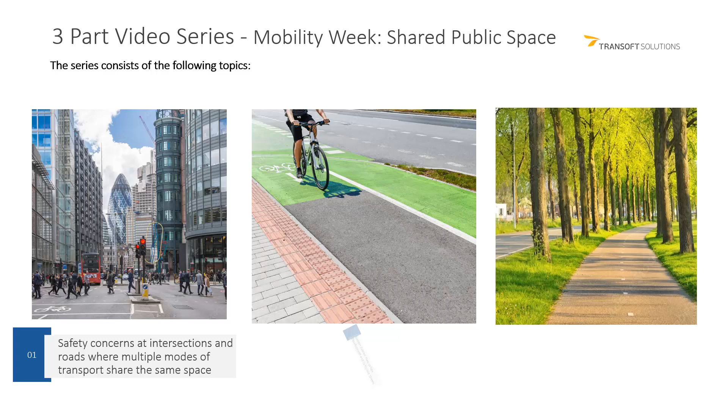The 3-part video series for Mobility Week started with safety concerns at intersections and roads where multiple modes of transport share the same space. The one for today is about success stories, new urban development, and complete streets. And the last one will be future cities and how they could look in future with less modal conflicts and a safer shared space for micromobility and walking.

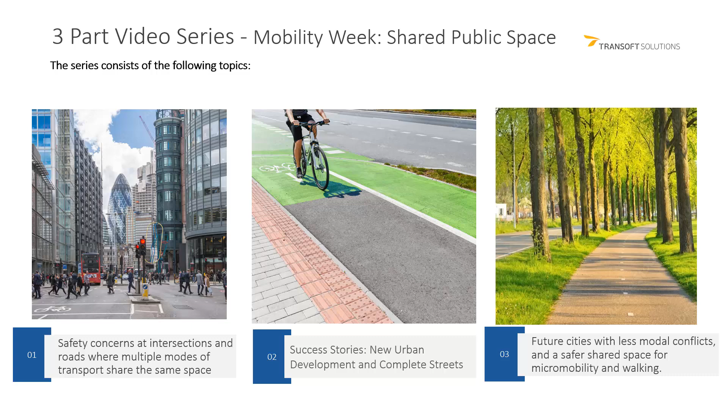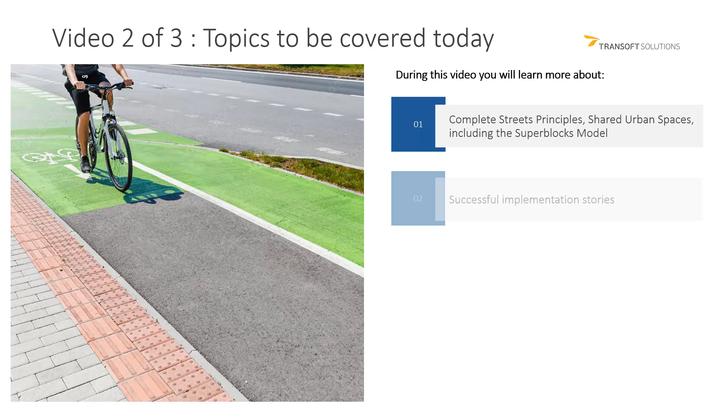Topics covered today are complete streets principles, shared urban spaces, including the superblocks model, success stories, and then advanced swept path analysis of these improvements as analyzed in AutoTurn, and then a quick introduction to our next video.

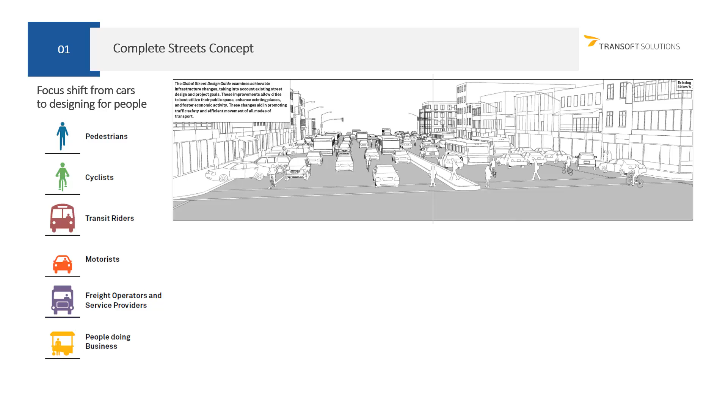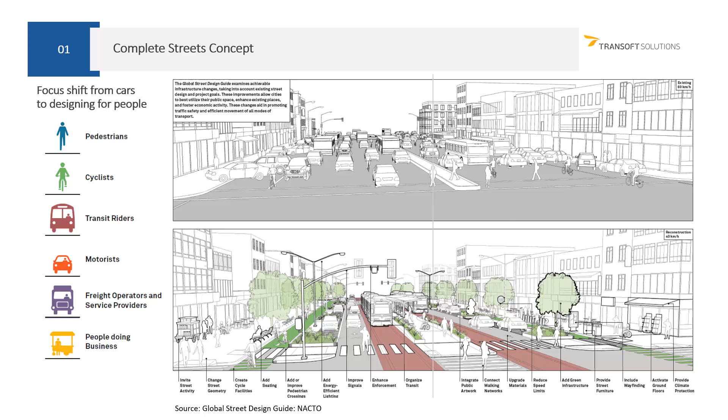The complete streets concept takes what you see here and changes the focus to pedestrians, cyclists, and transit riders, and less on cars. The street space is then totally transformed into dedicated cycle lanes, lanes for cars and lanes for transit, and safe walking areas. The next concept is shared urban spaces.

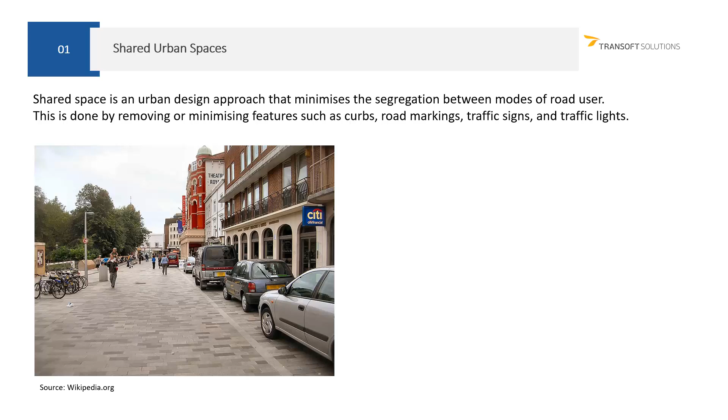A shared urban space is an urban design approach that minimizes the segregation between modes and road users. So it's all more mixed. This is done by removing or minimizing features like curbs, road markings, traffic signs, and traffic lights. Shared spaces can take on many different forms, and there is no single way to design them.

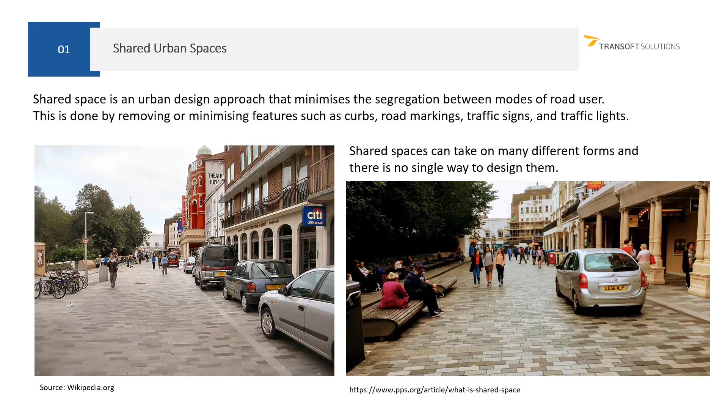Some features of shared spaces can include the following. The center of the street is a shared area and is used by all types of users. There are no curbs, which makes for a seamless experience throughout the space. Limiting level separation between modes makes it easier for vulnerable users like people with limited mobility, wheelchairs, and strollers to move around in the space.

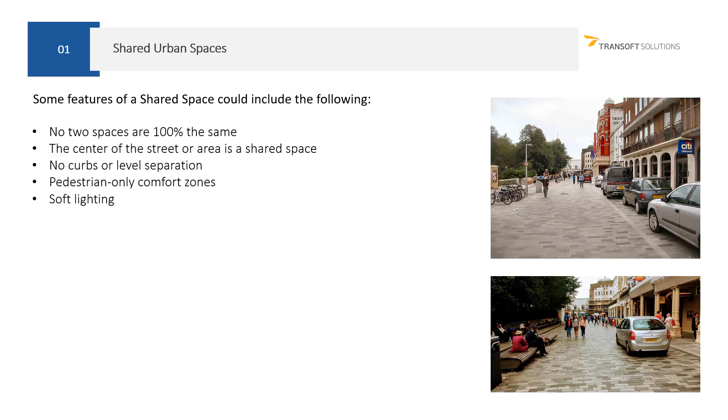There are pedestrian comfort zones, and they consist of obstacle-free pedestrian routes where pedestrians can move around more safely without the risk of conflict with other users. Where possible, these zones are aligned to the proximity of the building faces, and they are normally wider than standard walkways. Soft lighting creates an atmosphere that makes all the users clearly visible. There is well-designed drainage that blends into the environment.

There are furniture zones with shaded trees, seating, trash and recycling bins, bicycle parking, and other comfort items aligned with light poles where possible. There are places for people to gather and rest and mix throughout the space. Raised pedestrian crossings and raised intersections reduce traffic speed.

There are tactile warning strips, used at entrances to the shared space and throughout intersections to indicate a change in the environment, which is necessary for people with limited vision. Then there are sound beacons and audio signals. These are used also to inform blind or visually impaired pedestrians that they are in a shared street, and provide information on its operation and the presence of detectable surfaces, like the tactiles.

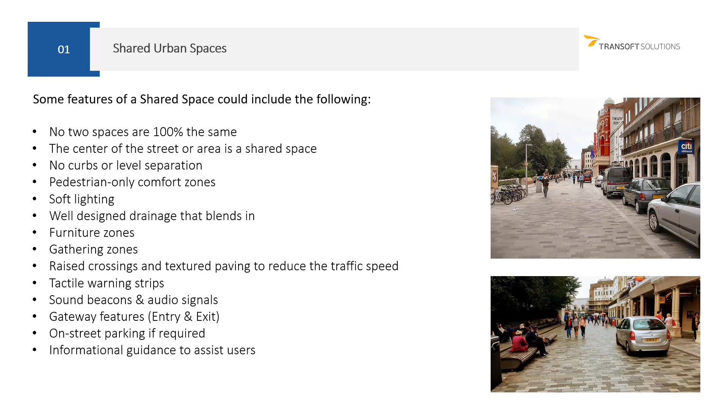In a similar way, at gateways, which are the entrance and the exit to this area, there must be information to notify people that they are entering and leaving a shared space. On-street parking can be accommodated if required, and information guidance is required to help people use the space. This could include signs, kiosks, auditory cues, as well as information provided to apps on your cell phone.

This is an example of a shared space. It's Exhibition Road in London, UK. This is the aerial view just before it was completed. It's 800 meters long and in some places 25 meters wide. It was originally a two-lane car traffic road with narrow footpaths and 3 rows of parking, one on either side of the road and one in the middle. It was remodeled and completed in 2012.

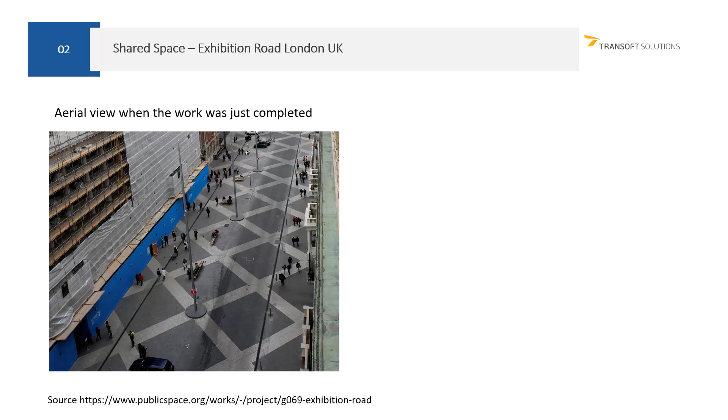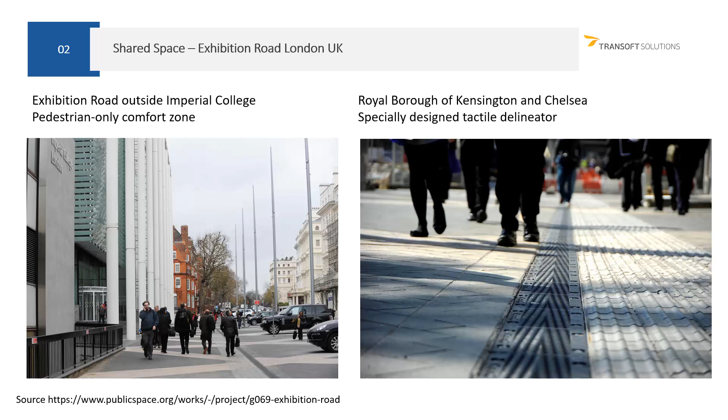This is Exhibition Road again outside Imperial College. This is the pedestrian comfort zone. You can see that there are specifically designed tactiles to inform visually impaired pedestrians to safely navigate through this shared space.

The superblocks model, I want to explain that. It is a model based on taking 9 blocks on a 3x3 grid, like you can see here. Then the principle is to close off the inner streets to cars. The traffic is diverted to the outer streets, and this is then the superblock.

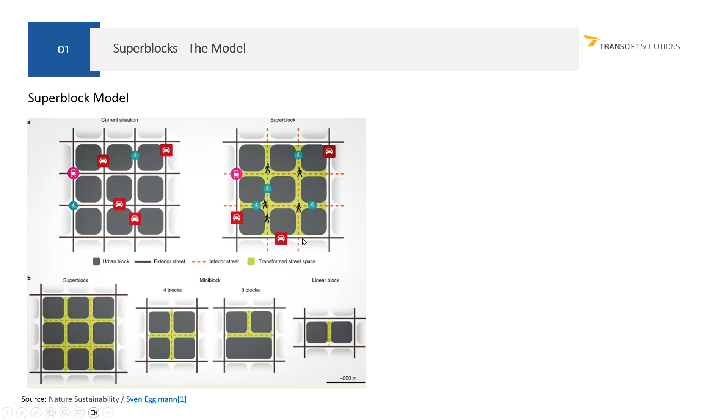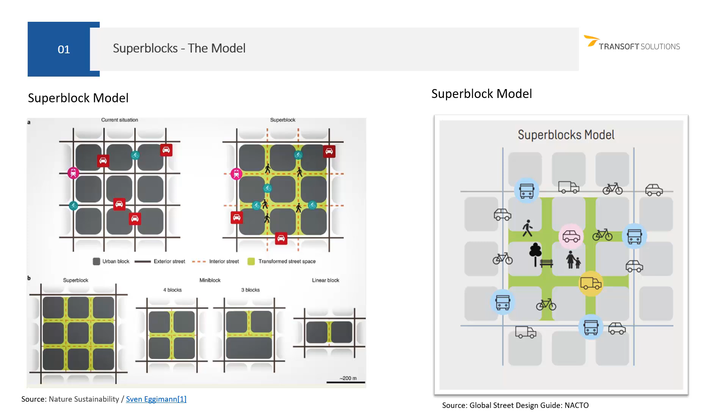The next diagram shows that limited vehicle traffic is allowed inside the block. There will be streets that are earmarked for buses and last mile deliveries, and shared with bicycles and pedestrians. Traffic inside the block is calmed, space is greened and remodeled, and there are more living activities happening inside these superblocks.

In Barcelona, superblocks were implemented. In Barcelona, 60% of the public space is designed for cars, and only 20% of the movement in the city is actually by car. So there's a great opportunity for improvement, and this is why the Superblocks program aims to reduce car traffic. It reclaims the public space for pedestrians, bicycles, and public transport.

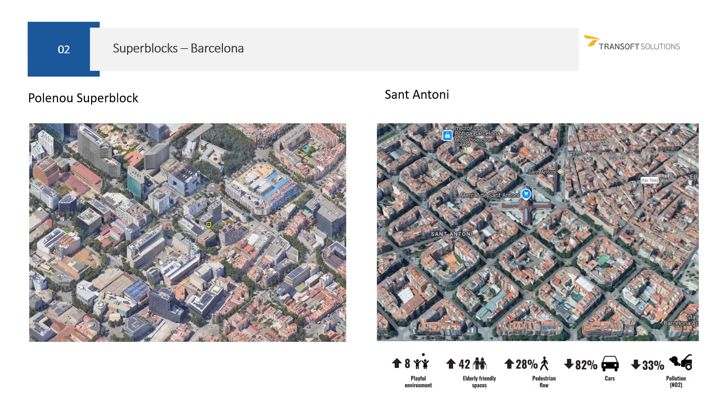In this example of Sant Antoni, you can see it's a more playful environment. More elderly friendly spaces were created, pedestrian flow increased, cars decreased, and pollution was reduced as well. This example shows a before picture of the street where each mode was clearly separated, and the change now is a more livable area for pedestrians and people.

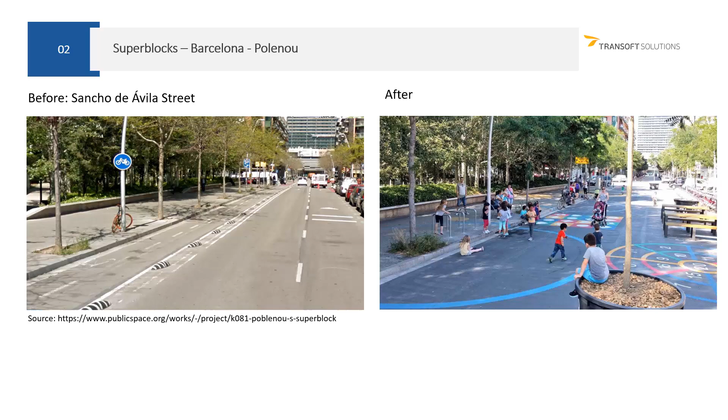Again, here is a road that allows for multimodal traffic, which includes bikes, and it will include cars and delivery vans in this space.

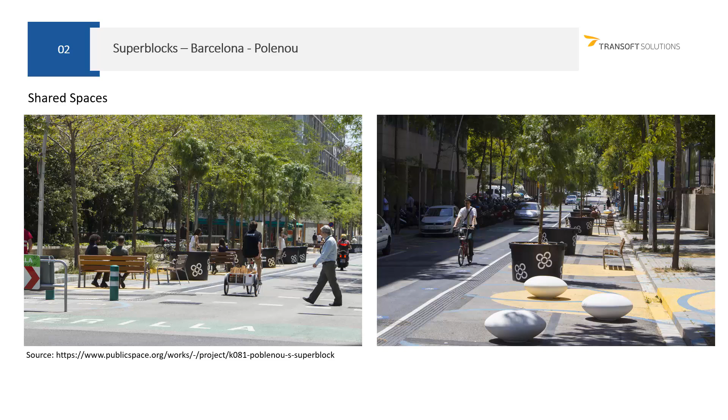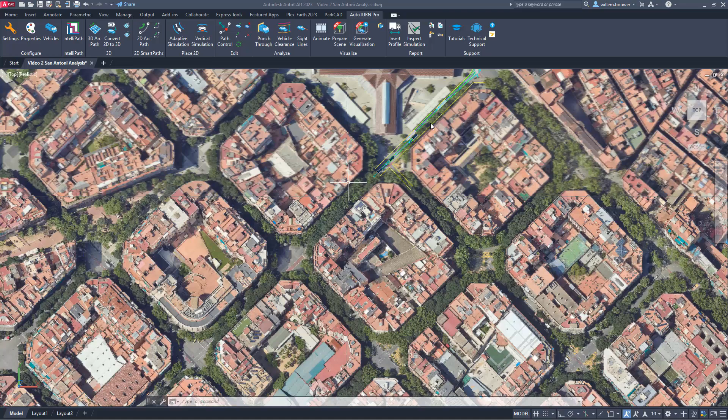In this example, I'm going to show you vehicle sweep path analysis that was done in AutoTurn. And this specific area is the Sant Antoni area in Barcelona, Spain. And you can see that I've traced some of the space already in yellow. I'm just going to zoom in a little bit more. And you can see I've traced it in yellow. And then I've done a sweep path analysis already with a bus.

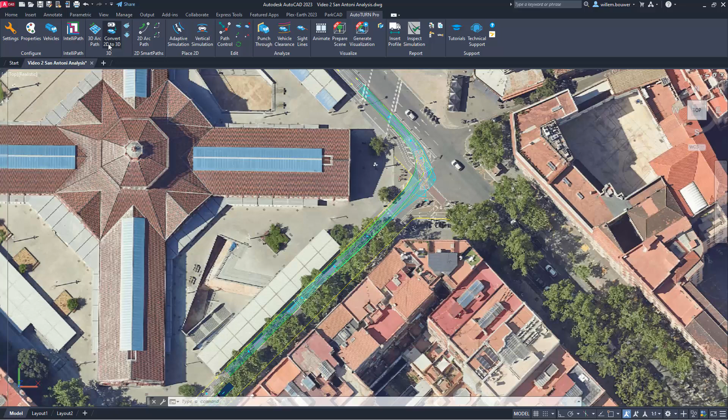And you can see at the entrance to the superblock, the turns are 90 degrees to reduce the speed of vehicles entering the protected superblock area. So this simulation was done in 2D. I just want to show you how to convert it to 3D if you had a 3D surface.

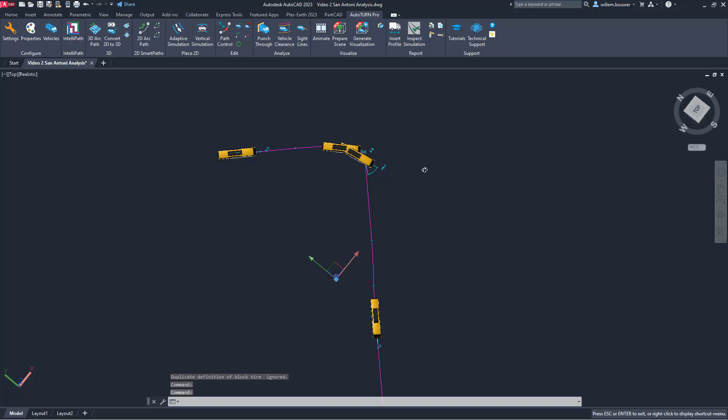So there's no surface selected, so I'm just going to use the XY plane in this case. But just to show you what a 3D simulation will look like. I'm not going to delete the 2D simulation, but I want to show you what this simulation could look like in 3D. And so in AutoTurn, you can place or remove vehicles. So there's 2 there. I'm going to remove 1. So this is what the simulation looks like in 3D.

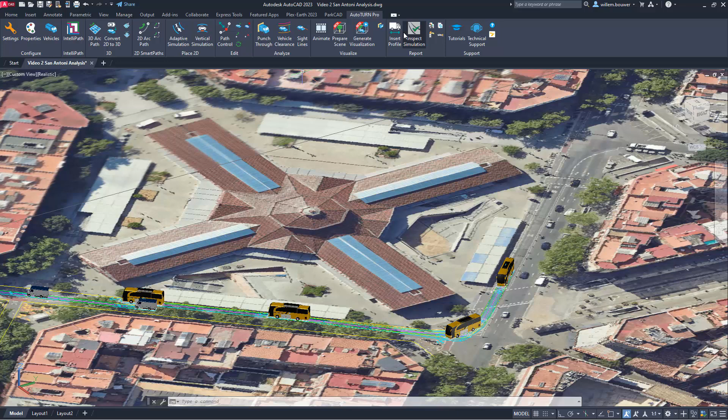And when I animate it, just to show how this vehicle turns into the superblock, I will click on the animate button, select the animation, and then I will change the speed to about 10, and I will click on animate, and you can see how the bus will move and turn into the superblock area. This is good for visual presentation.

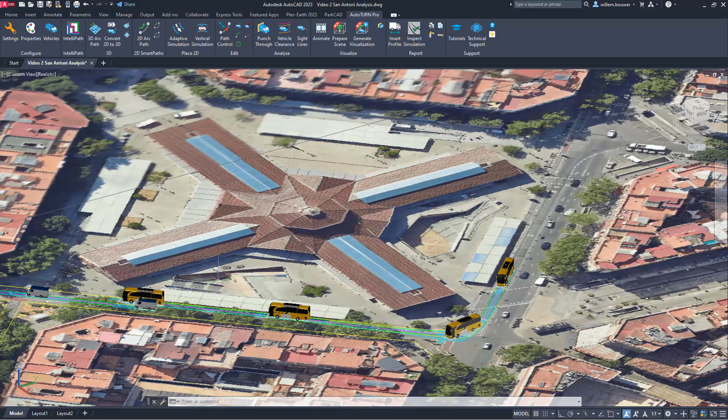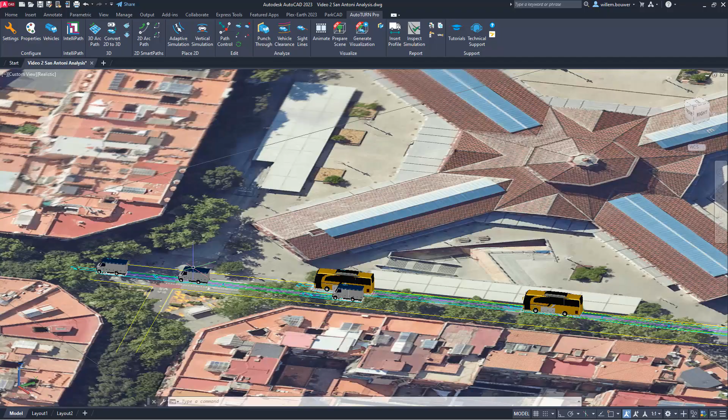And you can see I've also added a delivery vehicle, because in this street entering the superblock, multiple modes will be allowed. There's a dedicated bus lane, a lane for cars and delivery vehicles, and then also for cycling. You can see on this road that this street is now really an urban space where you have dedicated areas here for people for gathering. You have walk spaces. You have an area for bicycles. And if the odd car does come in here, there are speed reducing measures in this area like speed humps.

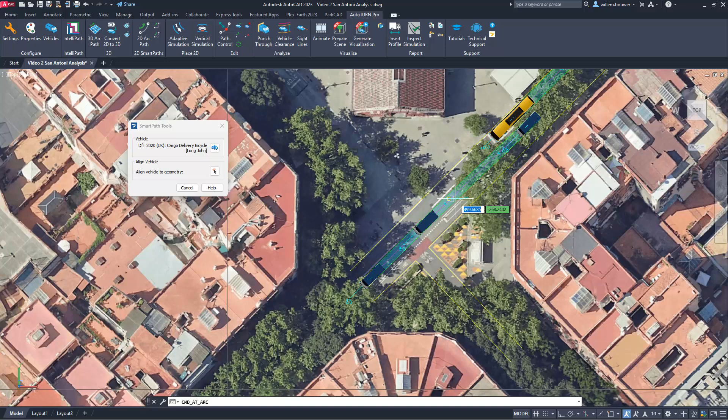So I'm going to show you in AutoTURN a simulation of a bicycle entering. So in this case, I'm going to use a cargo bicycle. I'm going to start my simulation with a 2D arc path. I'm going to zoom in. I'm going to place my bicycle here. I'm going to start my simulation. Speed probably on this section will be 12 kilometers an hour. But as you approach this intersection and bicycle lane, you would want to reduce your speed. Otherwise, you will not make the turn.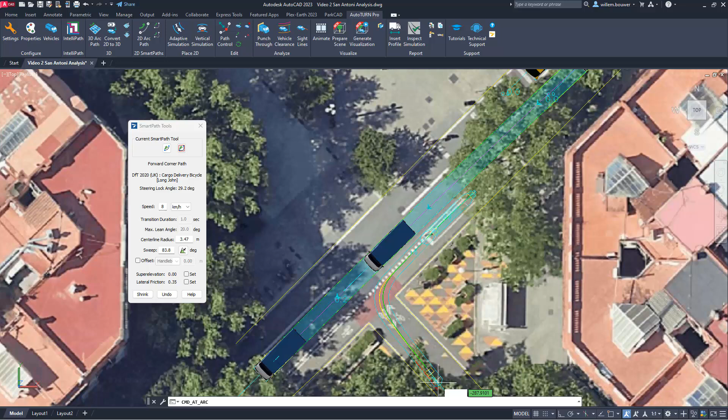And so I'm going to use a function here called corner path that will just assist me to turn in here. And you can see when you do touch on the traced areas that are my boundaries, it'll show you if there are conflicts. So I've just created conflicts here, so my simulation will show conflicts. However, I'm going to place this neatly so that I can actually enter this area. I'm going to continue my simulation, and I'm going to stop it here.

I'm also going to show in the next example, inspect simulation. And in inspect simulation, I'm going to evaluate speeds and just the maximum speed. And what you will see when I click it on this one, that the green is the acceptable speeds, 9 to 15 kilometers. Now for your specific design, you can change this so that it's perhaps 9 till 10 or 12. It depends on the specific design. And then you get a heat map like this.

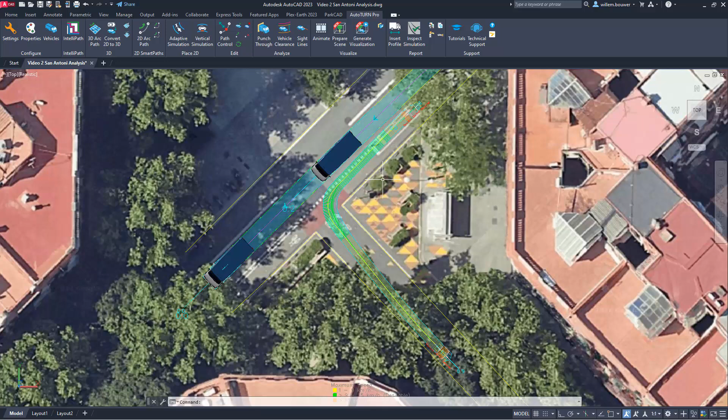When you look at the heat map drawn by inspect simulation, you can clearly see in the tight turn that it's green, so it's within the acceptable limits. And once you go out of the turn in the straight sections, the bicycle is capable of higher speeds. And this is where calming measures are employed to still reduce speed.

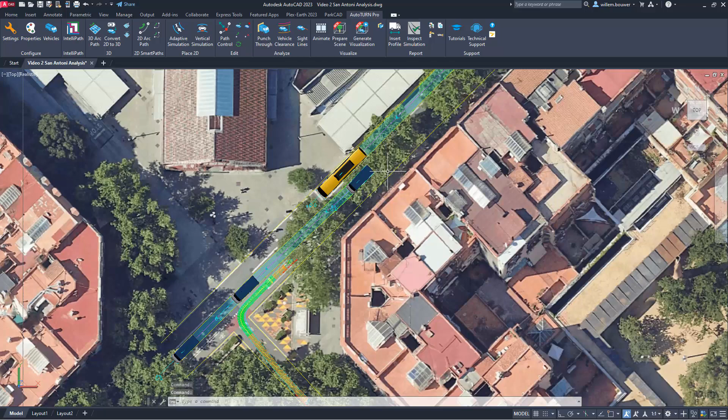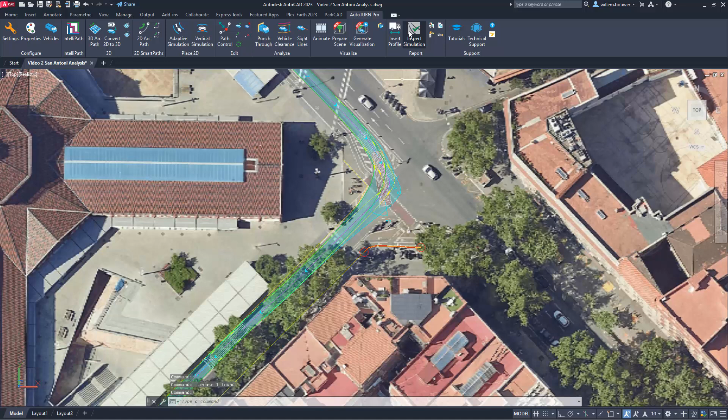I want to show you also the bus simulation, also with the speed simulation. And I'm just going to delete the 3D so that we can clearly see it. I'm going to click on inspect simulation. And I'm also going to look at maximum speed. I'm going to click on inspect simulation. And again, what you can see is round the tight corner here, speeds are within the desired speed limit. And as the bus goes into this road, it is capable of driving faster. Speed calming measures are then employed to reduce speed within the superblock.

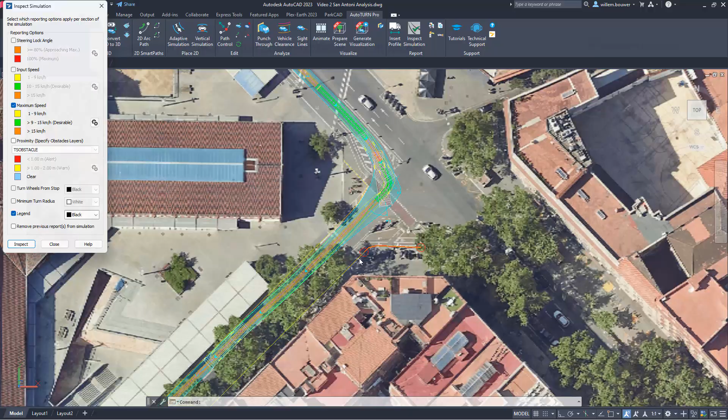Thank you very much. I'm going to go back to the final presentation. In our next video, we're going to show you what a future city could look like. There will be less modal conflicts and a safer shared space for micro-mobility and walking.